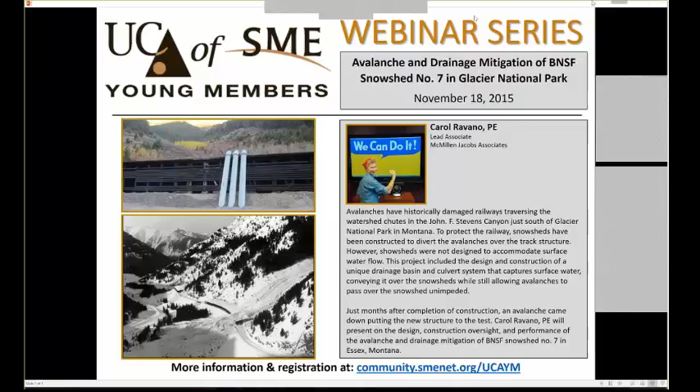Thank you. Sometimes the technology is a bit much. Anyway, I want to thank the Younger Member Forum for having me. Allow me to present this to you.

I know it's not quite what many of you think you might be doing, but as my career shows, you never know where you're going to end up. You've got my educational background. I went to UC Berkeley, got my undergraduate degree way long ago in 1983, and the economy was terrible at that point, so my professor said, why don't you stay and get your master's? So I did that in geotechnical engineering, and I'm glad I did so. I always loved the idea of being a geotechnical engineer, it was really a favorite of mine, just because it combined being able to be outside and working on interesting projects, and that's what it's really proven to be.

I'm going to just give you a quick rundown of my job experience. You never end up where you think you're going to end up. I first worked at a very big, now extinct engineering firm called International Engineering Corporation, which became Morrison Knudsen Engineers, and it's gone. And then having married someone in the Navy, I ended up in Seattle and worked for Dames & Moore, one of the first geotech firms up here. That was for 9 months. Got laid off, went and worked for Golder Associates, where one of my favorite jobs was working on the new Mount St. Helens, at that point, Mount St. Helens Roadway and Visitor Center.

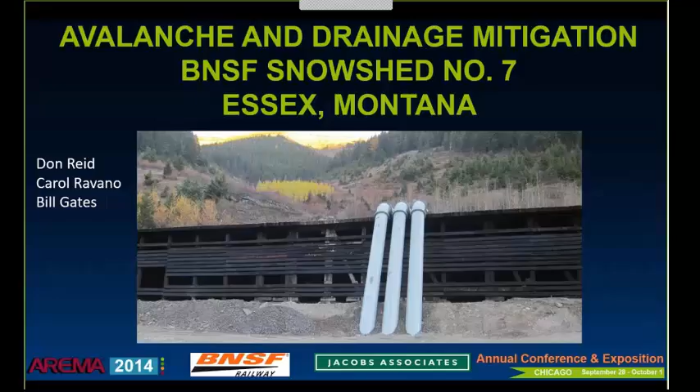The design work on this was done between June and October 2012, and the construction took place between August and October 2013.

Along this route, there are multiple avalanche chutes that drain large watersheds above the tracks. Snow avalanches have damaged the structures and trains along this route for years. Right now, the BNSF owns and maintains 9 of the original 12 snowshed structures that were constructed between 1912 and 1927 by the Great Northern Railroad, the predecessor to the BNSF in that area.

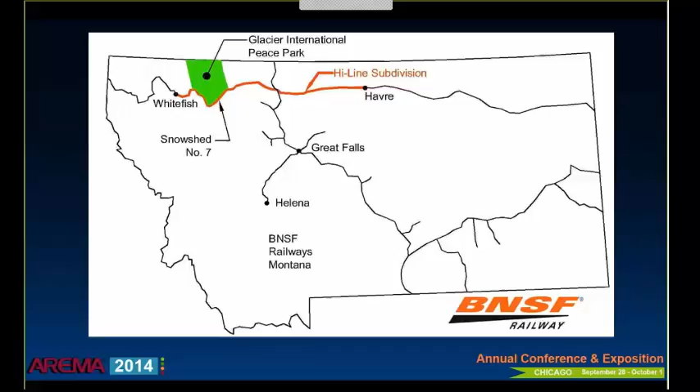I just threw in a few pictures to show you how picturesque the area is. Again, starting out my career, I never thought I'd be clinging to the side of mountains in Montana, but you never know where your jobs are going to lead you. So every once in a while I go to these job sites and think, I am so lucky to have this job.

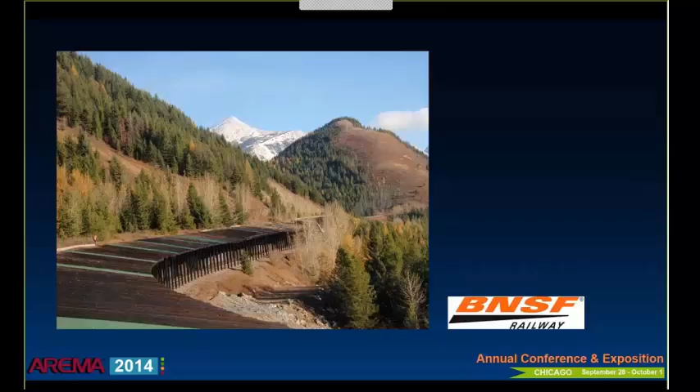Then there's a reinforced retaining wall on the uphill side - a reinforced concrete counterfort wall design, 30 feet high, 15 feet deep, and a 2-foot thick wall. The fill behind the wall consists of soil, boulders, and miscellaneous uncompacted construction debris, meaning we don't know what they put down there. The top of the fill forms a flat surface extending from the roof, approximately 80 feet wide between the back of the retaining wall and the toe of the slope. That toe of the slope is the boundary for Glacier National Park.

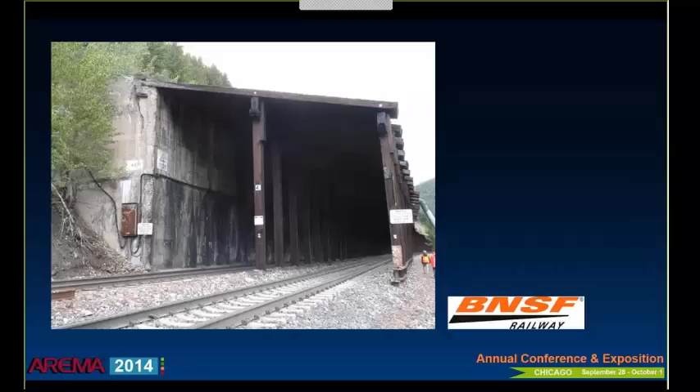Avalanches have historically damaged the railways traversing the watershed chutes in this canyon just east of Essex, Montana, between East and West Glacier, Montana. To protect the railway, the snowsheds have been constructed to divert the avalanches over the track structure. While they're great at withstanding the avalanches, they weren't designed to accommodate the surface flow that was actually damaging them.

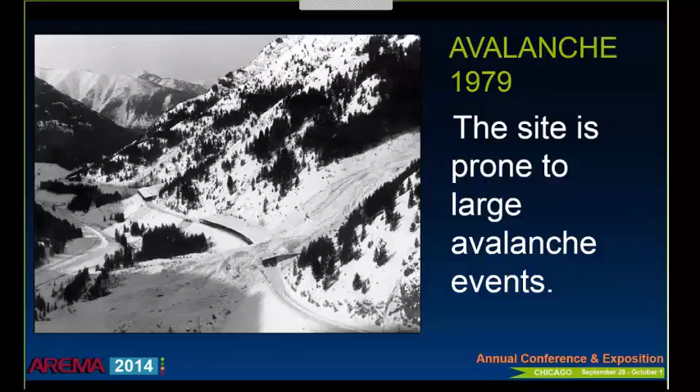To facilitate the design of the pipes, we retained GeoEngineers to perform a hydrological and hydraulic basin study of the watersheds above snowshed 7. The study included estimates of the peak flow rates for various design storms, culvert pipe capacity recommendations, and estimated maximum thrust in pipe at the peak flow. GeoEngineers also provided assistance in the design of erosion control elements and avalanche mitigation measures.

Using a 100-year, 24-hour flood event, the findings from the study indicated that our peak flow was going to be 300 CFS, maximum flow velocity up to 17 feet per second, and the total thrust at a culvert pipe elbow, which we'll show you later, is 10.5 kips.

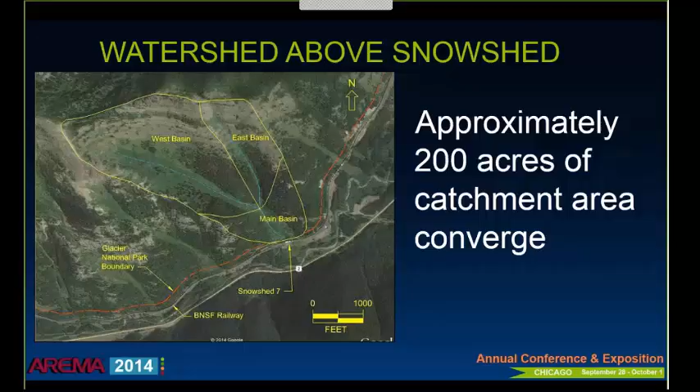The problem is it wears out the access road. The BNSF had tried to put sheet metal strips on top of the snowshed roof to divert the water runoff, but it really didn't help that much. So the resulting water leakage fouled the ballast beneath the tracks, and then the pumping action of the trains going over this jeopardized the integrity of the track structure.

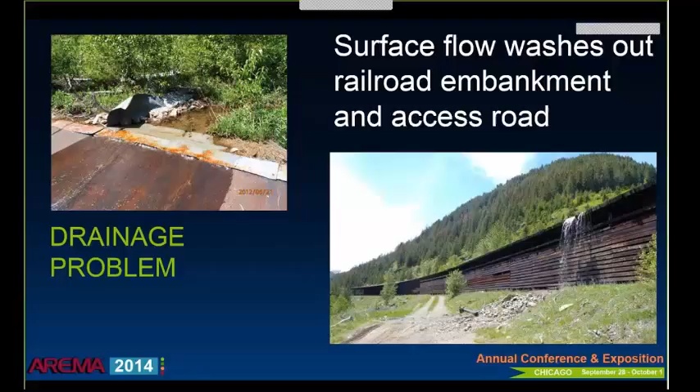You can see that in the photo on the left. The water flowing over the top routinely washed away the embankment and access road. On the left, you can see where the water in the track structure makes it worse. They had a slow order - that's what they call when they have to slow the trains down through this area. It's a double track, highly trafficked area, and they don't like to have slow orders on them.

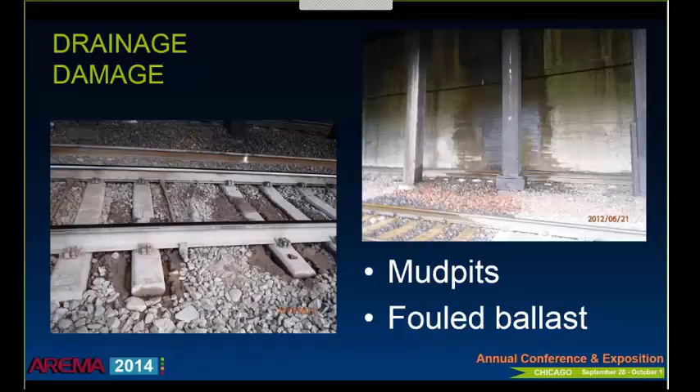You can see on the photo on the right how it's damaged the sidewall of that retaining wall. Due to freeze-thaw action, you get a lot of spalling - you can see the rebar in there and general damage. Here's a close-up of some of the structural damage, probably caused by freeze-thaw, also probably by excessive loading on the back side of the wall.

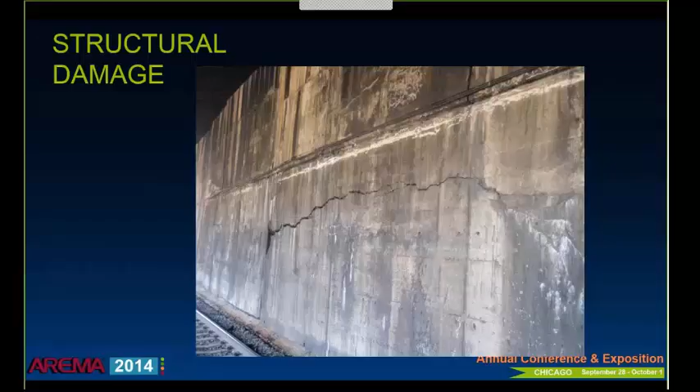So when we were coming up with a design, we wanted to mitigate all of these problems. Here's a close-up - somebody had put a crack gauge on there, and it was showing not only cracking outwards, but downwards also.

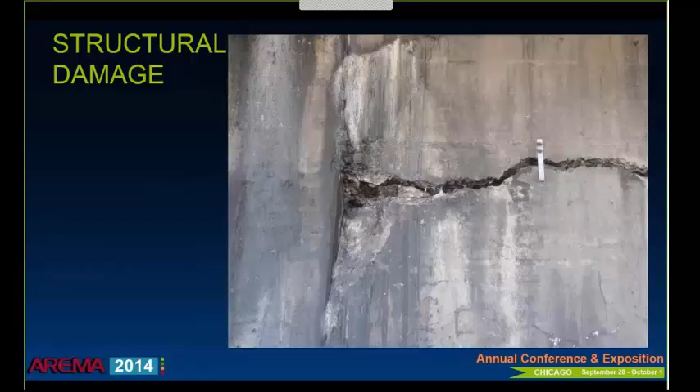Some of the interesting design criteria and constraints we wanted to take into account: it's a very remote site. From the closest decent town, Whitefish, Montana, or Kalispell, it's probably an hour and a half. So we had to think about that when dealing with concrete or any materials like that. It's adjacent to the national park, meaning they did not want us to touch anything on their property at all. We actually put up a barbed wire fence to remind the construction workers that we weren't supposed to touch it. Very constrained site.

We have the mountains to our back, and we've got the snowshed below us. We have the highway, we have creeks and rivers. Very limited laydown area. One of the other things we wanted to do is try to use as much native material on site as we could, and we were pretty lucky in that - I'll go into that a little bit more later. We were able to use the native rock and soil, which helped with costs, but also schedule.

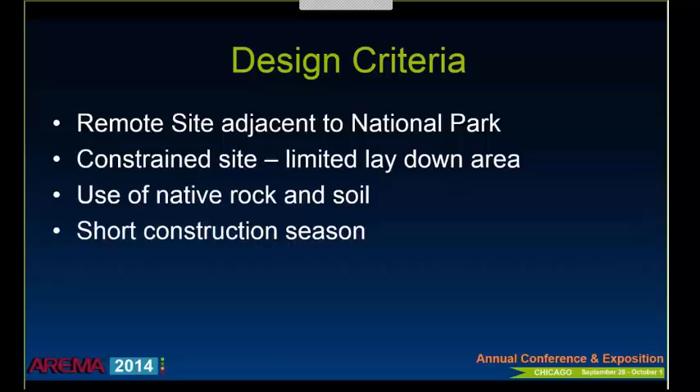And a very short construction season - snow doesn't melt up there until July often, and it starts up again in October, November. So we didn't have much time to actually do the work. Here's what we came up with. We had about 7-8 months to do the design and do all our calculations, etc.

Basically, we had the surface runoff coming from the watersheds uphill of Snowshed 7, discharging behind the snowshed retaining wall. Here's a cross section - you can see our snowshed to the right, kind of a cutaway of the retaining wall back of that, and then what we designed. So we've got a catchment basin to intercept, collect, and direct the surface runoff towards a centrally located drop box and culvert system.

The berm and the catchment basin, which we've identified as the berm catchment area, occupy the accumulation zone of an avalanche path. So to counter the potential ramming forces during an avalanche, the berm has a relatively low profile and few surfaces normal to the avalanche flow. To reinforce the berm, a high-strength TECCO mesh was anchored on top of the riprap and on the foreslope of the berm using spike plates attached to tensioned 14-foot-long grouted soil nails.

I'm going to show you pictures of each of these, but this is for the overall. The steel mesh is designed to prevent the riprap beneath from becoming dislodged from scour and avalanche events. The array of soil nails also anchors the berm structure against thrusts from an avalanche.

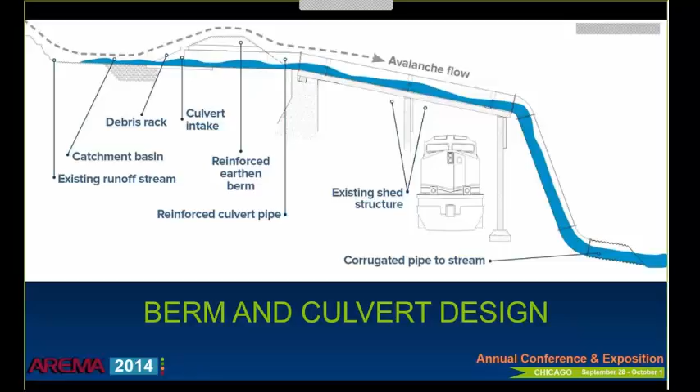At the end of the outfall culverts, we designed a riprap mattress to absorb energy, dissipate flow, and minimize erosion into the existing creek.

So here's our start of construction. As I said, this is a really remote site, so we had to pioneer a road to get the materials up over the side of the snowshed to the back of it. We had a couple of choices: pioneering the road into it, or lifting the materials up and over with a crane to the back of the site. We chose the pioneer access road.

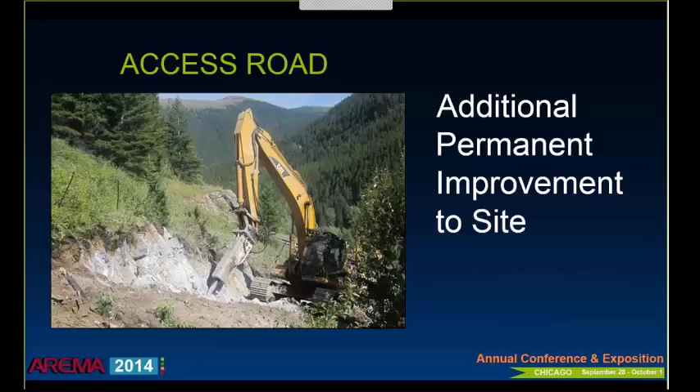We used a couple of cat excavators, one with a rock hammer and another with a cubic yard bucket, and took the material out and stockpiled it, which helped with the schedule.

So I showed you the cracks on the back of the retaining wall of the snowshed. We wanted to not only fix some of those cracks, but because of the surcharge loads from the equipment during construction and the additional overburden from the earthen berm we were putting on top, which would affect this retaining structure, we added self-drilling rock anchors.

These were 2-inch diameter, 25-foot long, Williams self-drilling anchors. We put 34 of them in, located about 8 feet below the top of the retaining wall, spaced 10 feet apart.

They were self-drilling and used grout instead of water for drilling fluid, because the ground conditions behind the retaining structure were varied. We really didn't know what they were, but we knew they would probably cave. Having the grout instead of water helped us get the grout out there, and with self-drilling we didn't have to excavate a hole, pull the rods out, and put a rod in, because it probably would have caved in. This was the quickest way to solve the problem.

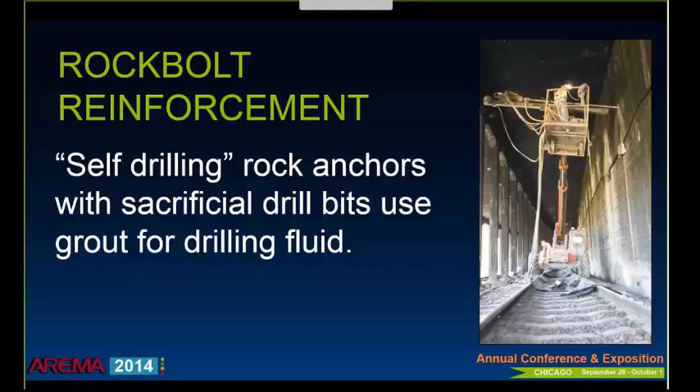We also had, you can see the cracks, that's the side wall, with the access road coming up to the right of it. We added some reinforcements there to take care of those cracks that you can see.

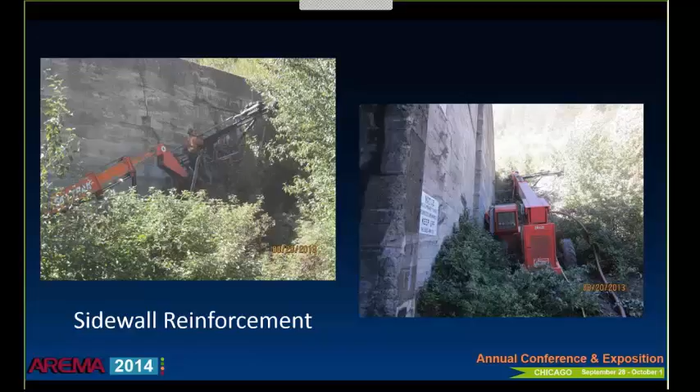So this is on top. You can see the snowshed roof in the photo on the left, and clearing and grubbing. Again, you can see the steep slope off to the left. In addition to clearing and grubbing, we dug some test pits to locate suitable material for the berm construction. We had some lab samples done, and it showed well-graded material with low permeability that we could use for the berm structure.

We also needed rock for armoring, and by wandering around the site with a geologic hammer, we were able to find some good sources for that too, which saved a lot of time and money and helped with the schedule.

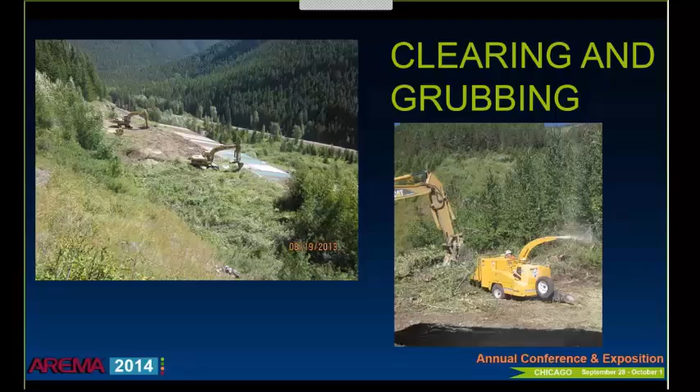So here's construction day in and day out. We not only did the design, but we had a resident engineer out there during construction, because given the unknowns we were going to encounter up there, we needed somebody to make decisions on all sorts of things, from what type of materials to use, et cetera. So, typical lovely day out there.

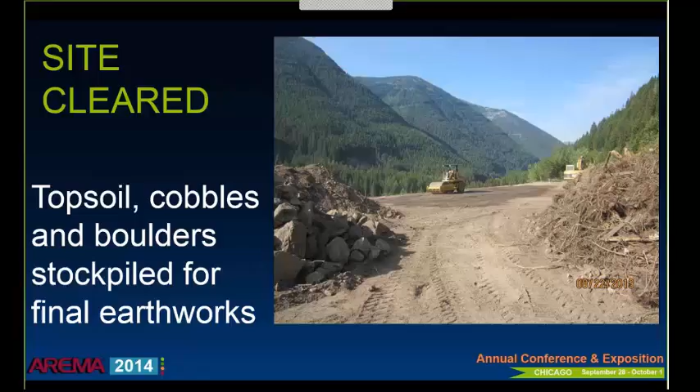And here we are over-excavating and proof rolling. Again, not knowing what material was there, we wanted to make sure we had decent compaction of the native material before we started to build on it.

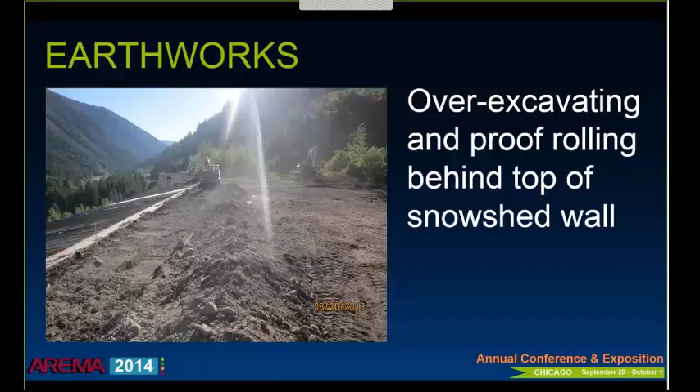Here's the berm we designed up on top behind the snowshed to intercept, collect, and direct the surface runoff towards a centrally located drop box and culvert system.

Again, we had to design it to withstand the potential for avalanche flow. So this material was the native material, and we put it in 12-inch lifts and compacted it with a vibratory roller to 95% of standard Proctor. Pretty typical.

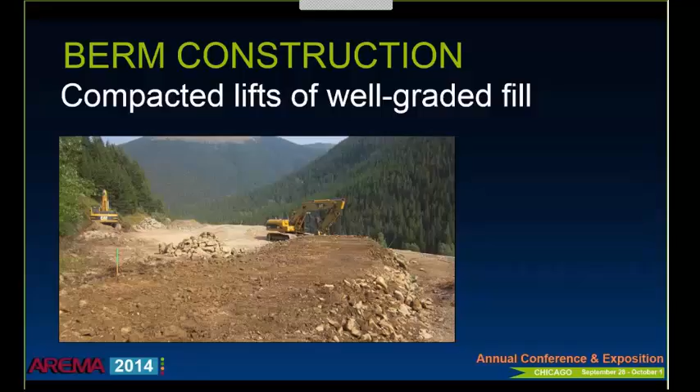We also placed a filter fabric beneath the riprap armor to segregate them.

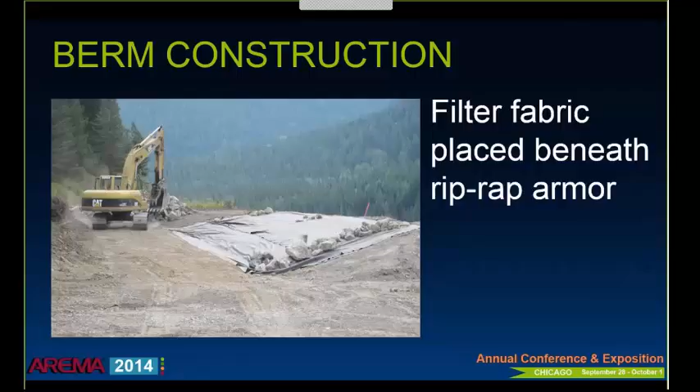And then it was time to start moving the pipes in place. Again, 3-foot diameter, I think these sticks are approximately 30 feet long, with a 1/2-inch thick steel wall. So pretty hefty.

Extra sturdy, and this is coming up that access road that we pioneered. You can see the double-track railroad to the right.

This work was at times performed under live track, meaning there's trains running here. So in order to move equipment or personnel across, we either have to have a window where they don't allow trains, or we always have a flagger, someone from the railroad offering us protection, telling us when the trains will come, et cetera. So in that sense it's different than a normal construction site, but we were lucky to have no problems at all.

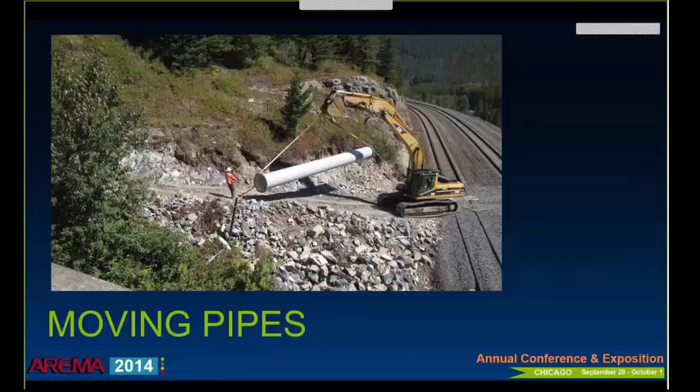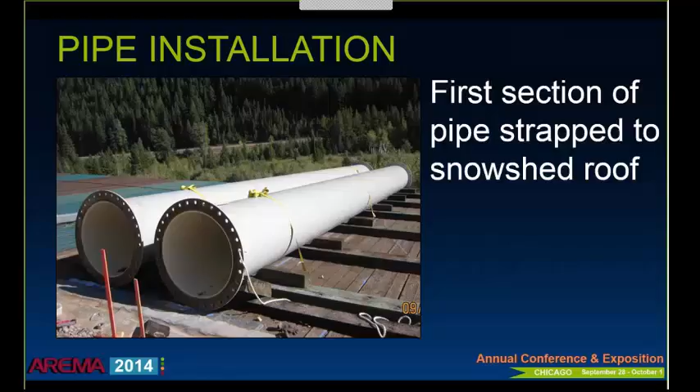What I want to say is also in the background you can see where our drainage basin is. So it's very high, very steep, rugged country, and that is Glacier National Park.

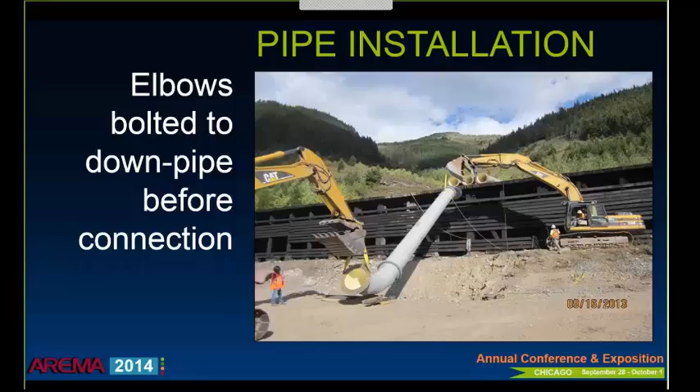At the base of the pipes, we had corrugated culvert connecting, which would then ultimately be buried. These then went into a riprap outfall and connected to the existing creek where the water was going to anyway, but this is a much more controlled manner.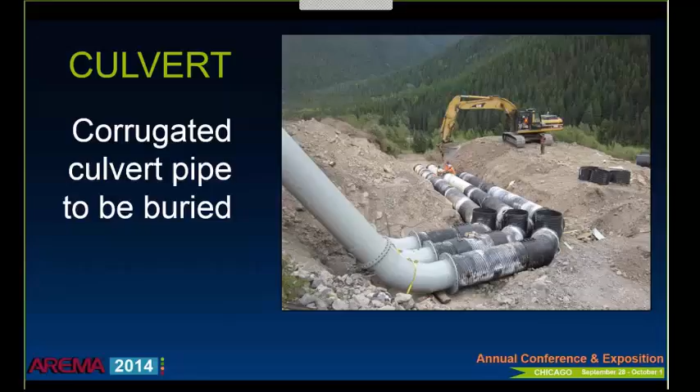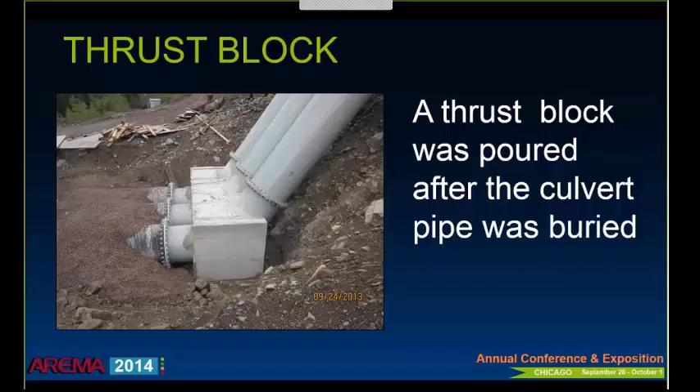Here's a thrust block that was poured after the culvert pipe was buried. Again, 5 feet by 5 feet by 15 feet. It's steel fiber reinforced concrete - there is no rebar in that. So this is down at the base.

And then up top, we have our berms. You can see those out to the side.

This is the culvert intake, and this is the form, so this is formed concrete. They did get concrete trucks in - they said they had to drive about an hour and a half, so it had to be specially formulated so it wouldn't set up. Anyway, this was all formed on site: first the base slab, and then the wing walls and the head walls, integrated into the pipes that went over the top.

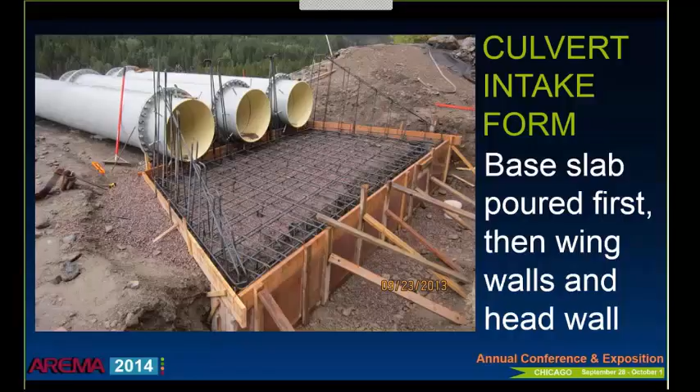And here's the finished structure. Again, to the left, you can see the berm. You can see the geofabric there separating the fine-grained berm from the riprap on top of it.

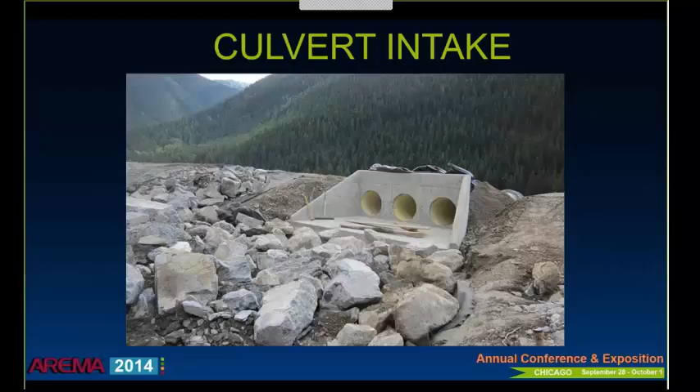And then I'll show you on top of that, we're going to put our Tecco mesh. So around the sides of this culvert intake also, they backfilled with the finer grained sandy soil and compacted that. Here's somebody doing it with a hand tamper.

And then we have our Tecco mesh, which is a very sturdy reinforced wire mesh, and they put it there to reinforce the earth berm against the lateral avalanche thrust.

As it was designed, you can see them installing these anchors. Those are 14-foot long anchors that they're putting in there, not only for the Tecco mesh, but also to reinforce the actual berm.

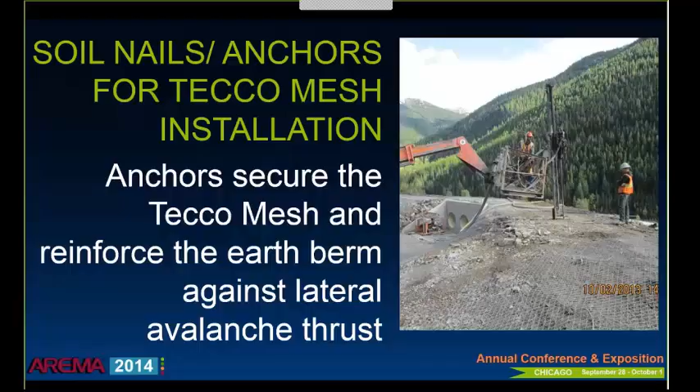You can see around the edge of the culvert intake structure, the cable - I should say, not just wire - that connects the edge of it. It's very heavy duty, so it's a great product for uses like this. And then you can see the trash rack installed to keep the debris out of the culvert. That was done in place.

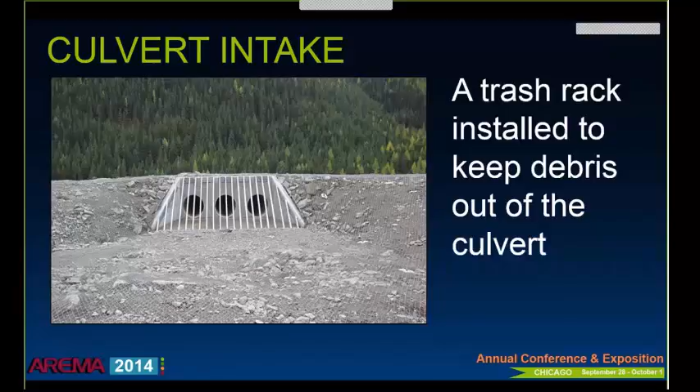Anyway, so this is the final look of our upstream structure. We just thought it would be waiting for snow melt to do the job. And here's the completed structure, facing into Glacier National Park with the pipes coming over. Most everything's buried, like a lot of our underground work. All our hard work, nobody gets to actually see, but we know it's down there and feel proud about it.

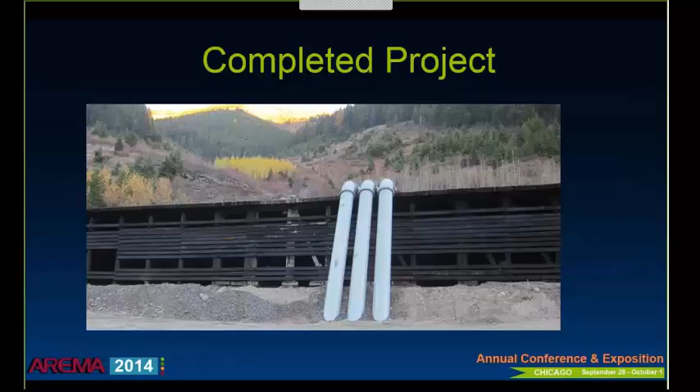So there'd been the avalanche in '79, that had been the most recent one. We completed this project in October of 2013, and lo and behold, the next March, less than 6 months after we finished construction, another avalanche came through.

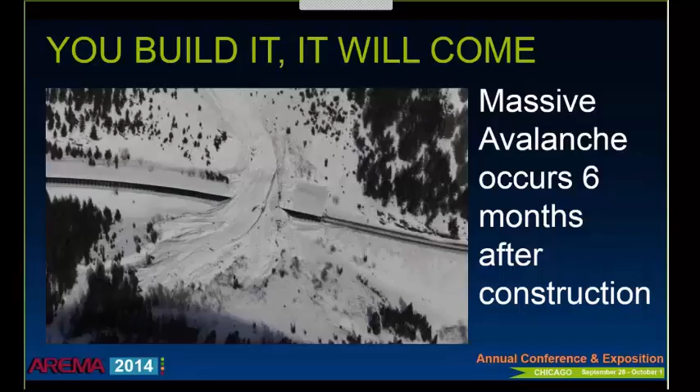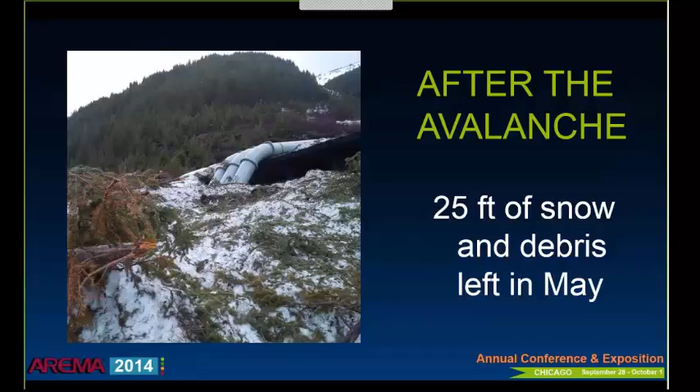I went back to the site in May, and you can see up to the edge of the snow shed in the front, this is the snow and debris and big trees that had come down from the avalanche over the top of the snow shed. But it was great to see everything working.

This is, I think, about a 12-inch diameter tree that was just snapped off. It's amazing to see the power.

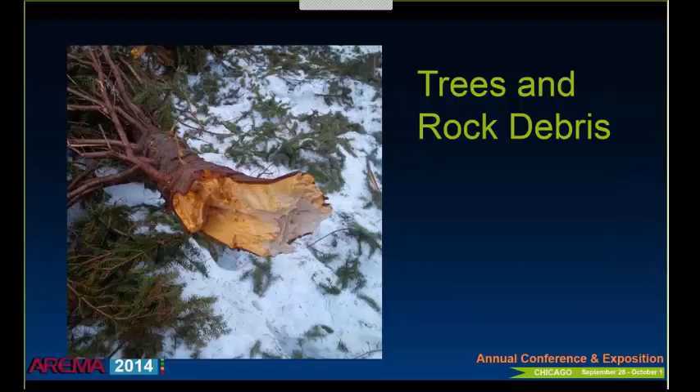And this is then up on top a little bit later because everything's dry, but these are just some of the smaller debris that was left up there. There was other stuff that the railroad did move out of the way of our grate there. So it's functioning as designed.

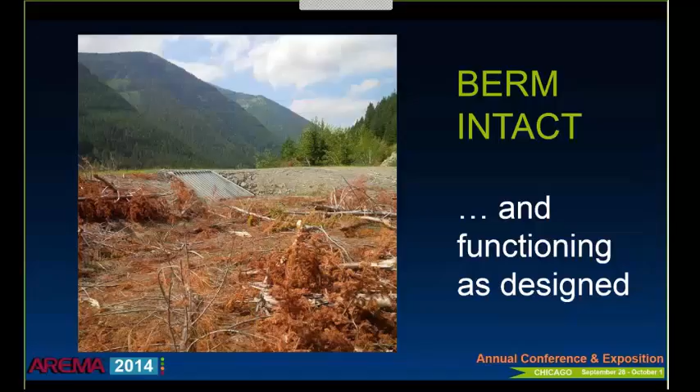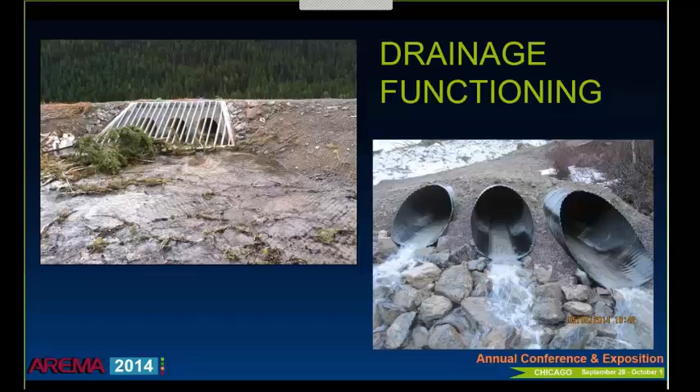The berm was intact. That TECCO mesh did its trick. And then the intake on the left, but then the outflow, so we could see that the drainage was functioning even before we could see the complete pipe. So quite proud of the job that we did there.

And then that's the end of it. Here's my contact information if anybody has any questions or wants to contact me.

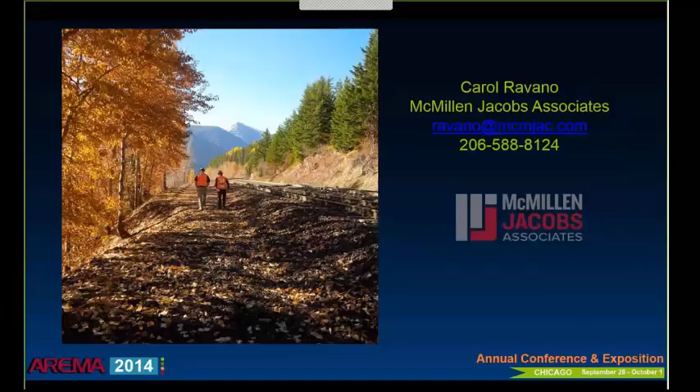Let's see, I was going to give the conclusion. I don't know if there's going to be questions, but they said at the end if I wanted to talk about my passion for the industry. I have to say that for the most part we do a lot of railroad work. I spend most of my time in railroad tunnels around the United States. We've done a lot of capacity improvements, etc. A lot of the tunnels are just over 100 years old and just need upkeep, especially drainage issues. But they also asked if I wanted to talk about overcoming career challenges.

I'm not sure what stage some of you are at. Some of you might be students, some early on in your career, since this is the Younger Member Forum. Probably for me, the biggest challenge was getting married and moving with my spouse. I used to joke that my resume should go on microfiche, and some of you probably know what microfiche is, but I'd worked 9 months here and a year here, and that's what you get for marrying somebody in the United States Navy.

But what I found was, because I had a really good education and tried to keep up with what was going on, if you've got a great education, take advantage of that, and you're going to land a good job. That was challenging, but it gave me flexibility.

So advice for young engineers: I guess one of the main things is network. Go out and meet people at the Younger Member Forums, at conferences and conventions, because it's kind of a small group, especially working in underground or even in geotech. You're going to work for somebody or know somebody who works for somebody, etc. So don't be afraid to go out and network and meet people, and be active in your Younger Member Forum or in your professional society.

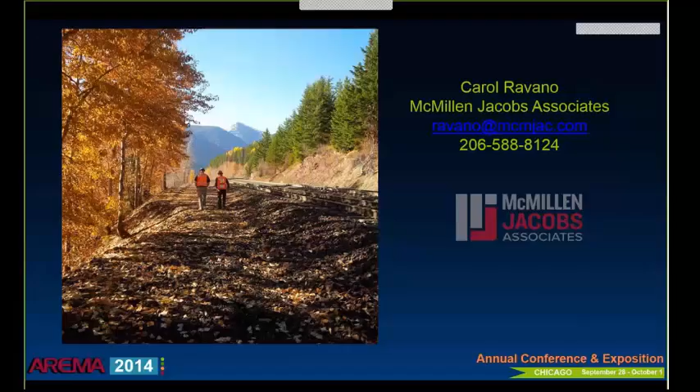No, I'm just so—thank you for asking me to do this. Shannon actually asked me and then left the country. But anyway, you guys were so professional, and I'm so excited that people are interested in the underground industry. I think it really is a place where things are really growing, and as I see it, there are fewer environmental issues to deal with.